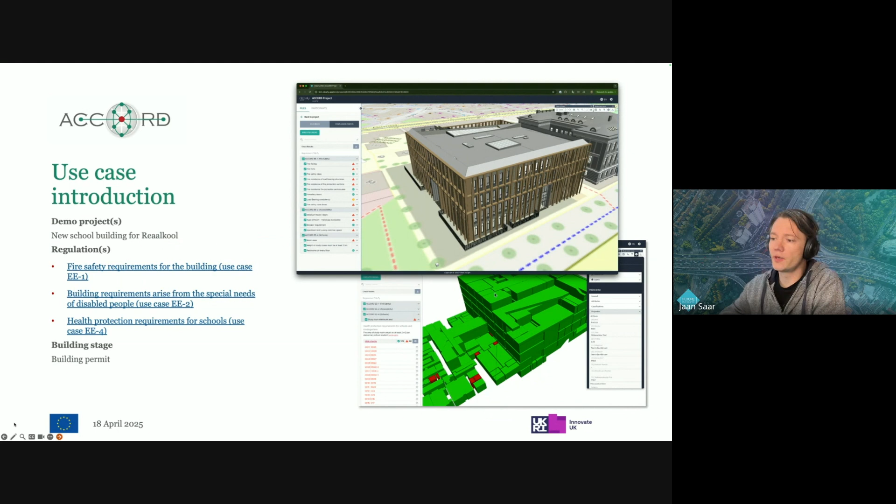We do use the components from ACCORD, the rule formalization. We looked at the rules and ran them through the process. We do have an IDS generation tool as well that we tried with this project, but we ended up using a largely manual process to actually get the rules and define them within Clearly BIM.

Because we weren't able to directly translate all the national regulation into executable checks, a manual step was needed in between, and Clearly BIM doesn't read BCRL yet. But the idea is that we still take the legislation, break it down into pieces, and make that into rules. We also use the common BIM standard from Estonia.

Within Clearly BIM, we have the option of running both IDS checks and compliance checking. There's a BIM viewer, it stores data, but the actual process of permitting is run in the National Building Registry, which also has a BIM module. But as I explained before, for the demo, we're going to use Clearly BIM.

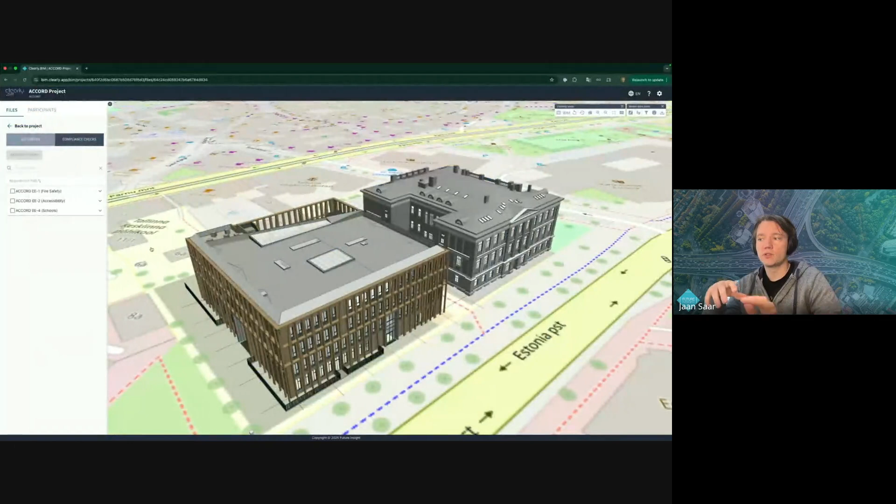So now I'm quickly going to jump into the Clearly BIM environment. So you see this is the school building. As Clearly BIM is also a standalone commercial service, you don't have to use the whole of the Estonian government building registry system—you can run the checks within Clearly BIM itself.

Here you see a breakdown of checks based on the legislation: fire safety, accessibility, and schools. I can select all the checks and execute them, and that's where the software runs the algorithms and shows you the results in a nice way. Some have passed everything, some checks are not passed, but some are partially passed or have some errors.

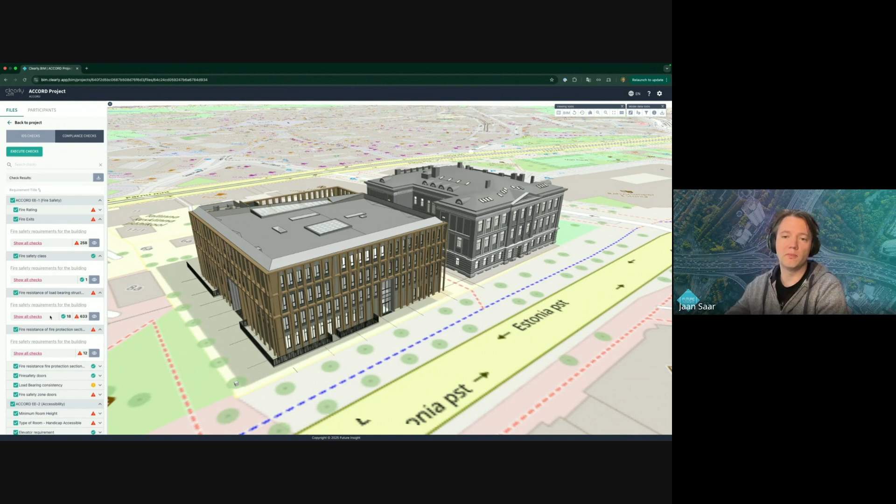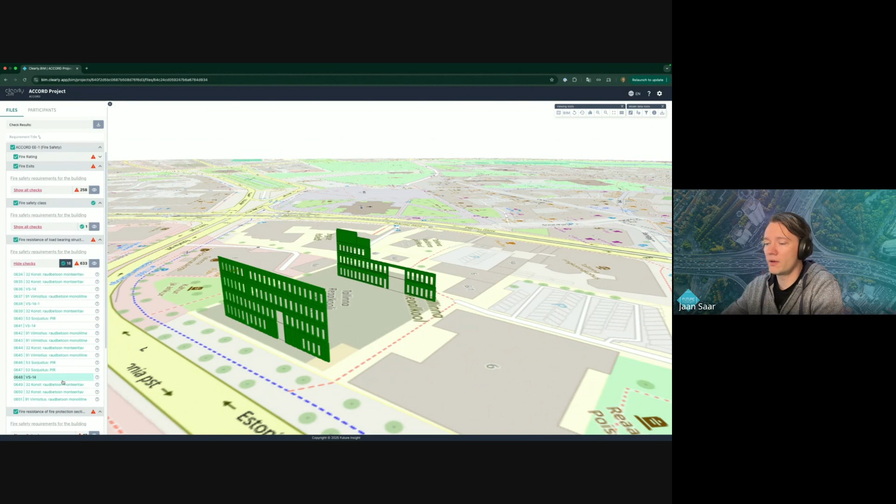For example, if you look at fire resistance of load-bearing structures, we can see which structures have the relevant load-bearing properties, and we can also look at the ones that don't. In many cases, yeah, this is also fine.

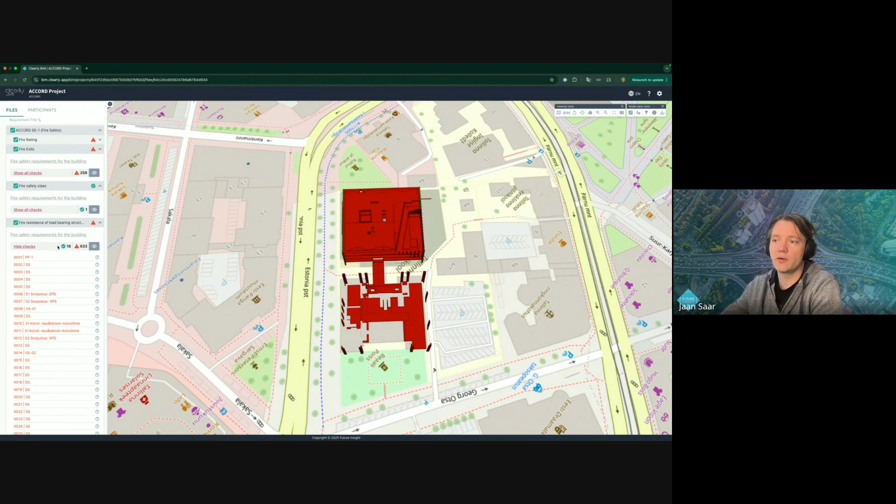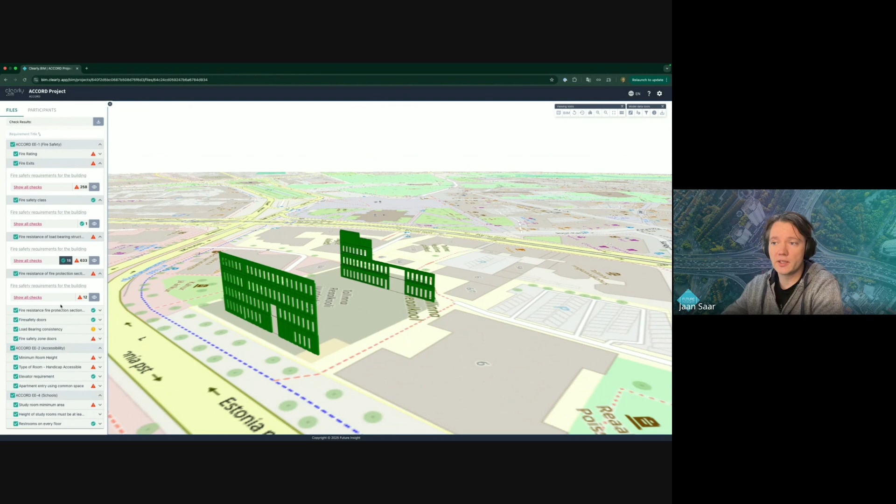I'm not going to go into the detail of all the checks because this is just a quick, short introduction to show you the demo—just to illustrate how these checks can be viewed and run within Clearly BIM for the project we had. And also for accessibility: minimum room height, the height of study rooms, restrooms on every floor where studying is being conducted. These are all the checks we implemented and configured specifically for ACCORD here.

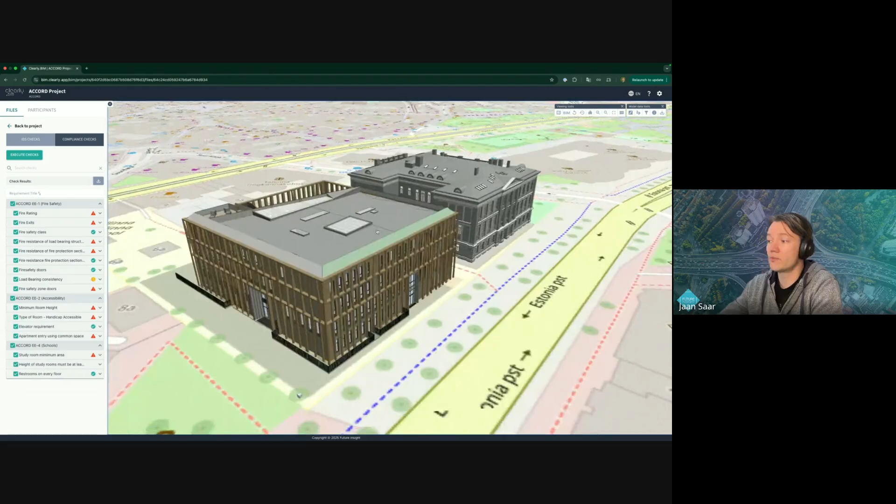What's cool about Clearly BIM is that it runs in the browser. It's easy to use, with really simple tools, for example just to look at different floors. But the power of the solution is—one thing is visualization, but running the checks and visualizing them is where it really has the potential to automate and speed up the whole building permitting process.

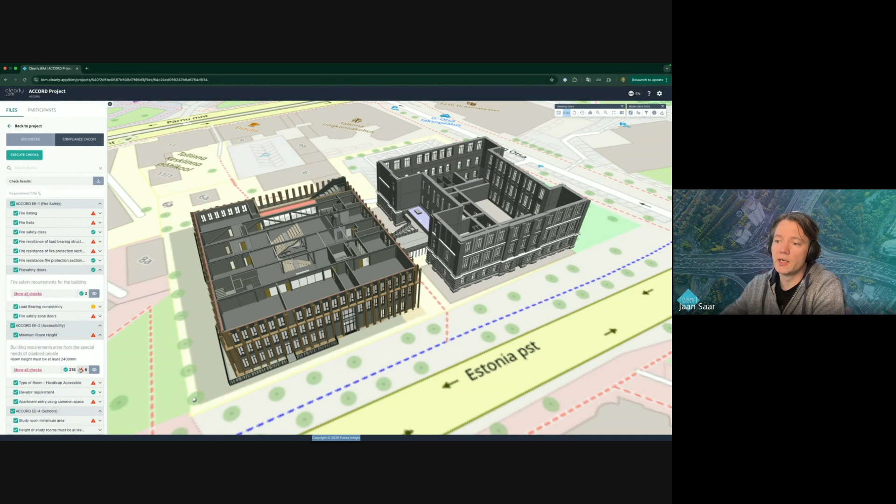Again, if I look at, for example, checks like minimum room height, I can see some rooms that don't match this criteria, and I can drill down into which rooms these exactly are. As I can see, this is actually not a real room—it's a storage area, so it doesn't have to meet the height requirements.

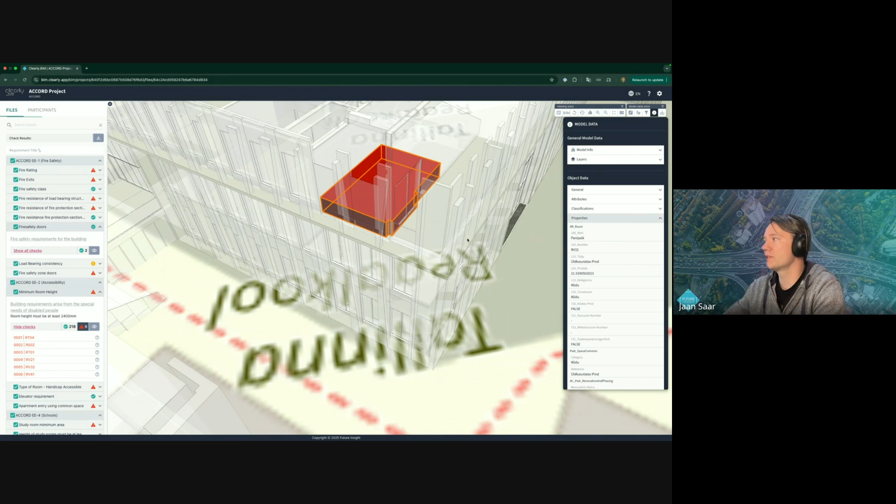So yeah, I think that's enough for the demo of Clearly BIM. Some quick lessons learned or feedback from authorities when we showed these checks and they had a chance to try them out: it's clear that the potential is there to really automate a huge amount of work that isn't done fully today using manual means, because it's just impossible to cover everything.

So it gives an added level of quality. From the designers, we also got feedback that it helps improve the model and helps in understanding the common BIM requirements—you actually see why these properties are required within the model so that you can execute checks. And when it comes to submitting an application, we can extract information from the model and automatically fill out a lot of information in the application, making it easier and faster for applicants.